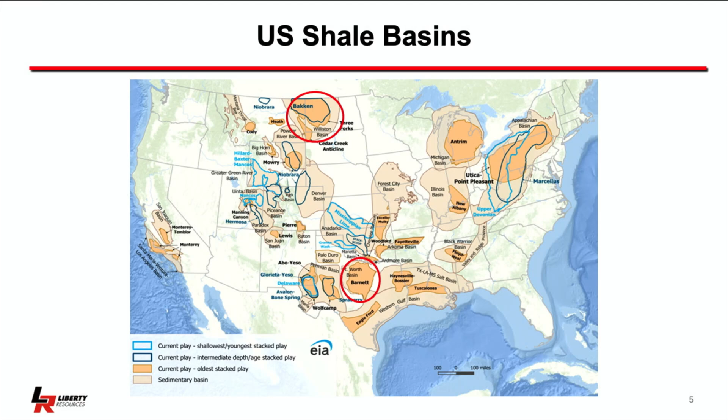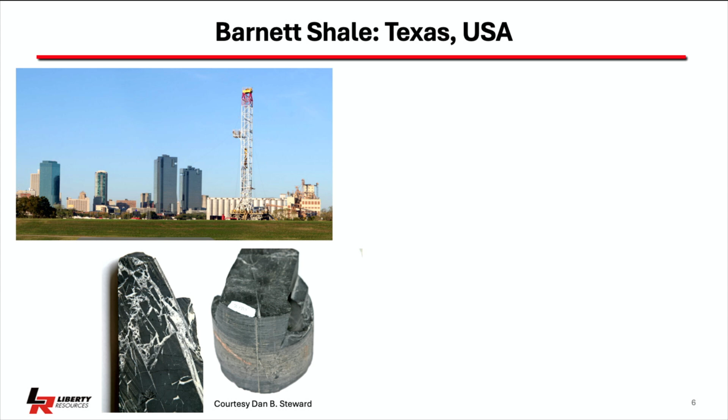Fort Worth sits on the Fort Worth Basin, where the Barnett Shale is. It was the first shale rock actually commercially exploited in a significant manner. By shale, I mean very tight rock, meaning the hydrocarbon, water, even air, is very hard to flow. We measure it in nanodarcies, which are 10 to the minus 9 of a darcy, a flow unit used in hydrology and petroleum engineering.

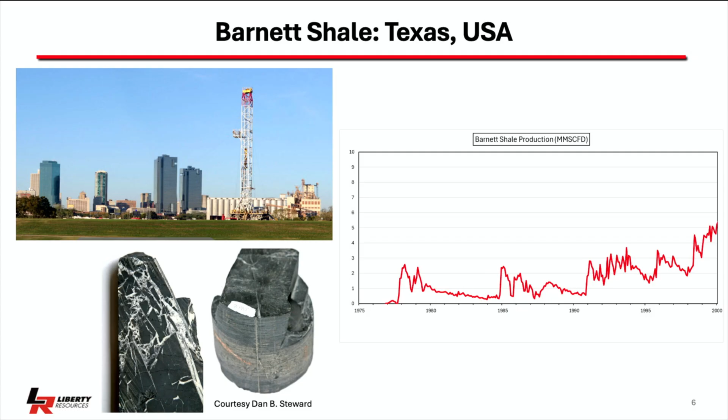First production out of the Barnett Shale actually happened way back in 1977. Production from then through 1997, and for the next 20-plus years, stayed very small, up to 5 million cubic feet a day, as operators tried new wells, drilled new wells, and tried to stimulate the rock to get hydrocarbon to flow.

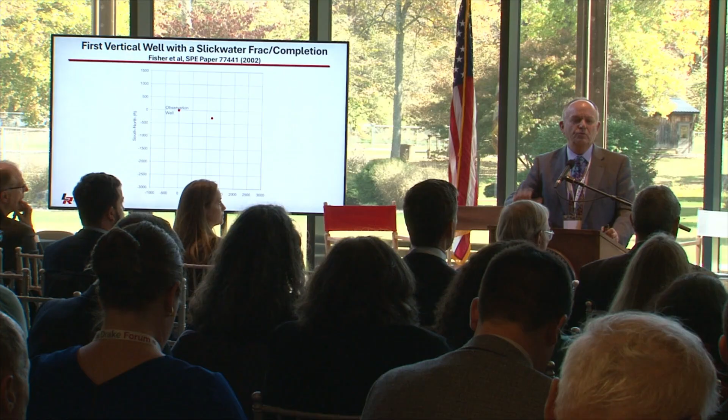Then in 2002, one operator ran an experiment with a vertical well and an offset well fitted with listening devices deep down, and pumped a new type of frac called a slick water frac. When they did that, they measured the noise emanated by the cracks as they formed, mapped them out, and realized this slick water fracturing was creating a much more complex fracture network for production. That well was a big success.

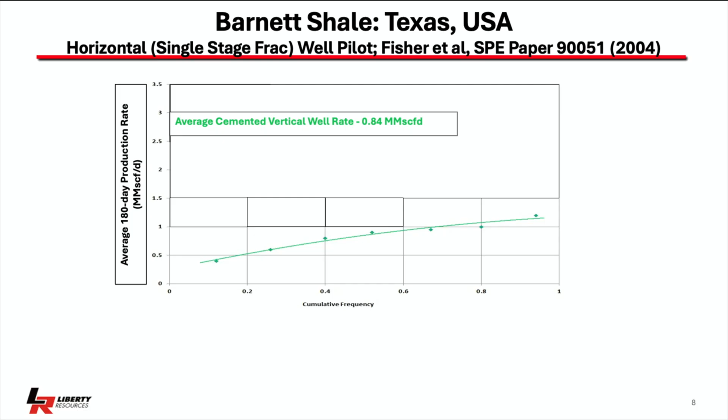The operator drilled 7 vertical wells and fracked them with this slick water process. Here's a production plot, a cumulative frequency plot: those 7 wells averaged just under 1 million cubic feet a day in their first 6 months, 0.84 million cubic feet a day. That was an impressive gain over what had happened in the prior 25 years.

Engineers then looked at the map and thought, what if we drilled a horizontal well going northwest and did a whole series of fracs down it? They tried that in some wells, running 21 of them. Some were cemented, some were not, and this more than doubled the production coming out of the wells.

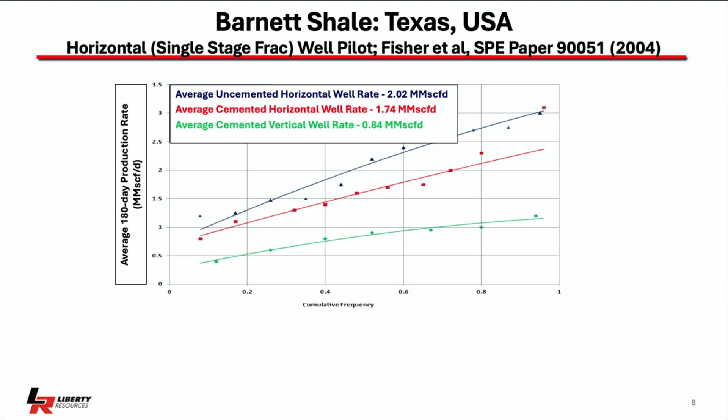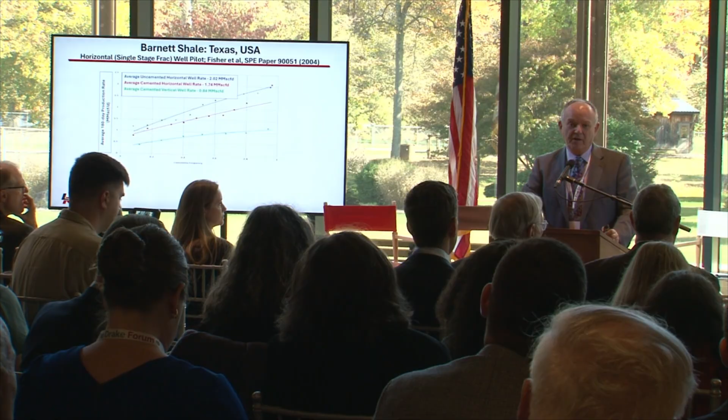I remember in 2005 being in my office in Dallas when a report came over: someone said, did you just hear in the Barnett Shale, company XXX just did 15 frac stages in a well? And suddenly things changed.

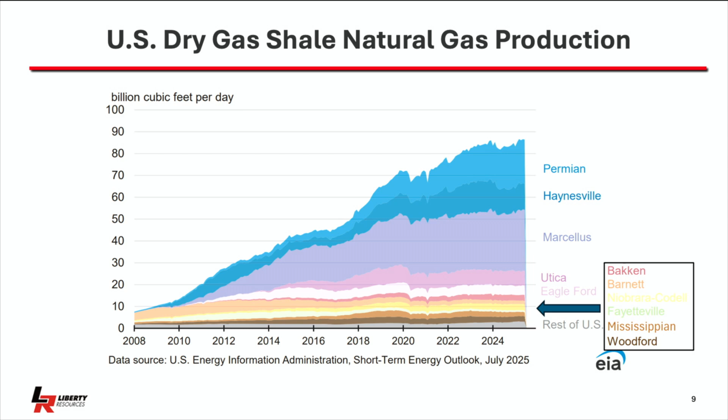Here's a plot from the Energy Information Administration. Back in 2008, that orange wedge was the Barnett Shale, over half of U.S. natural gas production from shales. As we took those lessons to other basins, you see the Haynesville coming on, the Permian growing, and here in Pennsylvania, the Marcellus shale growing to become the largest natural gas producer in the country today. In fact, 85 BCF a day of gas coming out of shale represents 80% of all natural gas produced in the United States.

This is from a resource that didn't even produce economically 25 years ago. 80% of our natural gas — powering everything here — came from a technology that wasn't commercially available 20-plus years ago.

My own company has been working over 15 years in the Bakken in North Dakota. We're headquartered in Denver, Colorado, and operate in Wyoming and North Dakota.

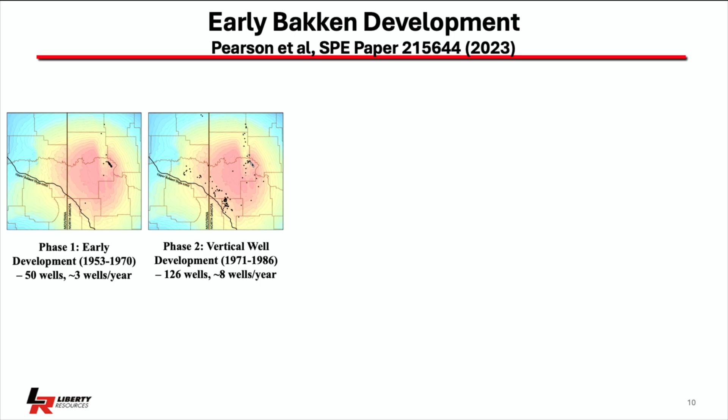Over the next 15 years, from 1971 to 1986, industry was drilling 8 wells a year. Those 8 wells were along structural features, something called the Nesson Anticline, that northern feature in the middle right, and also on the southwest on another structurally faulted area called the Billings Nose.

And then we started horizontal drilling. We found down in that Billings Nose area that we could drill horizontal wells into the natural fractures, and they'd actually produce a little better.

Development then shifted to Montana, to a subfacies, a type of rock at the edge of the basin called the Elm Coulee Field. We had a period of 5 years where development was focused primarily in the Elm Coulee, Montana area, drilling 100 wells per year.

Industry found on the eastern side of the basin a similar thing, better quality rocks. So wells were drilled on the east and the west of the basin. The first few wells were drilled in the middle part, which we call the central basin. But those wells were totally uneconomic.

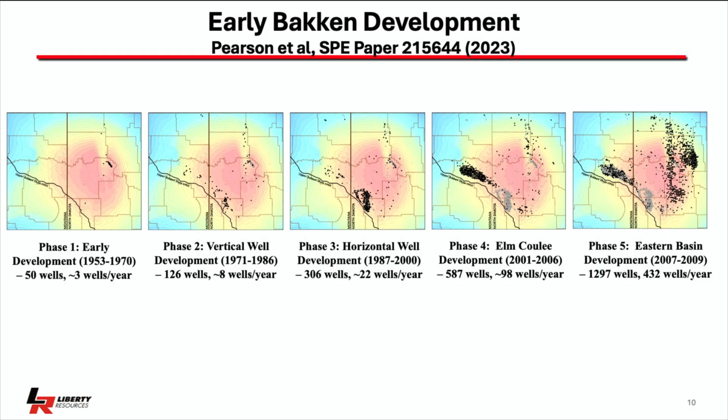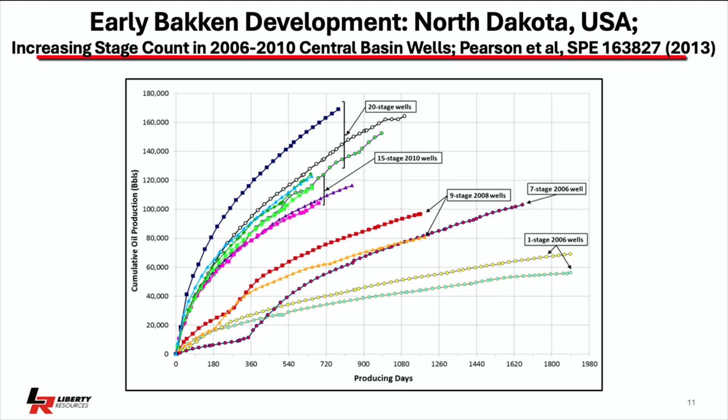Here's a plot showing some of the first wells on the bottom here, that in a 6-year period, those wells cumed a total of about 60,000 barrels of oil. Now, if oil is $50 a barrel and you get 60,000 barrels in 6 years, that's $3 million of revenue for a well that cost you $8, $9, $10 million. Plus you've got to pay taxes, plus you've got to pay royalty owners.

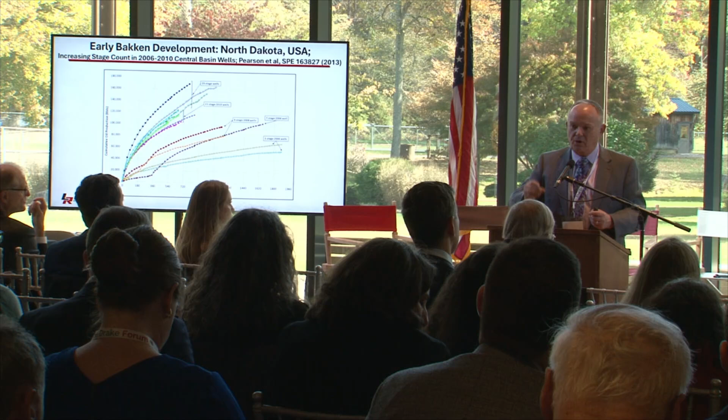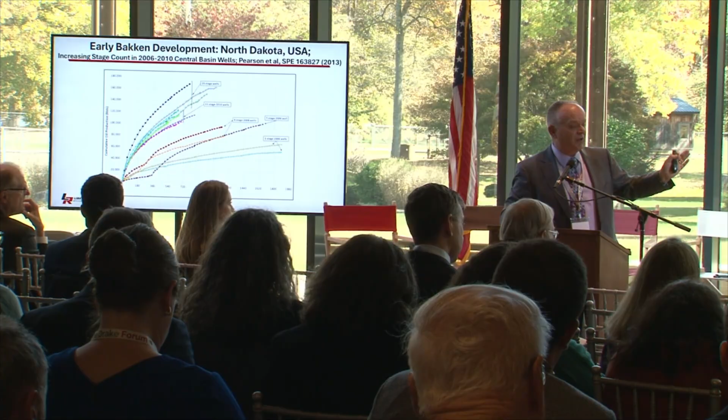Totally uneconomic. But what we found is that as we divided up the sections of the well into mechanically isolated different parts, which we call stages, and did different fracs in each of those stages, suddenly we go from 60,000 barrels in 6 years to 60,000 barrels in 3 to 6 months. Suddenly the economics have totally changed through the application of the technology of how we're fracking the rocks downhole.

Well, what happened? The whole basin gets filled in, drilling 1,500 wells per year, 11,000 wells drilled in a 6-year period. Things were pretty crazy in the Bakken during this period. Today, a more gentle, sustained level of just under 900 wells a year being drilled.

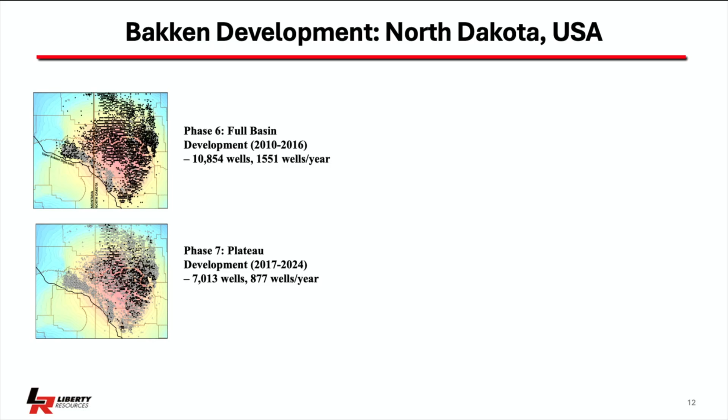Production in the Bakken went from 100,000 barrels a day in North Dakota, conventional and unconventional, to 1.5 million barrels a day. And today it's plateauing out at around 1.15 million barrels a day of oil.

So that was the first shale oil development that became economic. Again, similar to what happened in the gas markets, the oil markets were the same. The color hasn't quite come out here, but on the top, there's a pink area showing we've gone from 300,000 barrels a day from tight oil production to 9 million barrels a day.

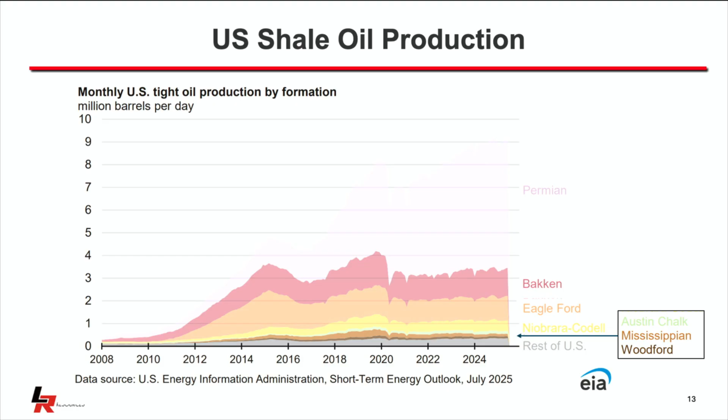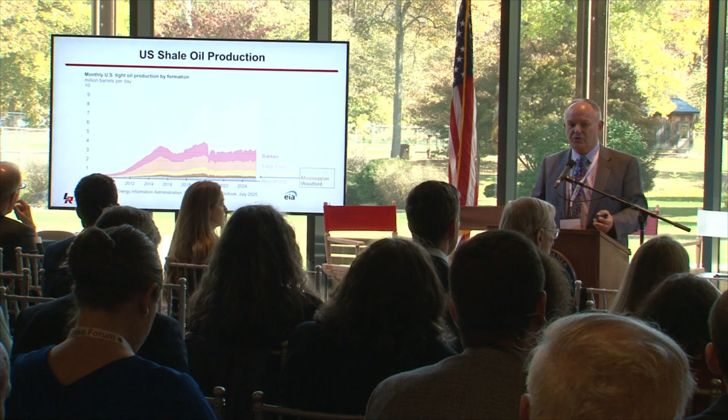That top wedge is the Permian Basin that's driving U.S. oil production. 9 million barrels a day from shale oil production out of 13.4 million barrels a day total. About 75% of our oil production is coming from these shale oil reservoirs. You see the Bakken is still there, the second largest production, the Eagle Ford in Texas, the Niobrara Codell in Colorado, and a number of other plays. So again, in 20 years, totally changed the U.S. energy position, not from oil being created, but by the application of technology, changing a resource into a reserve.

Okay, well, what's really driven that? What's driven it has been this technology that the media likes to call fracking. A tech guy like me, we call it hydraulic fracturing, but we can call it fracking today. I don't have a problem with that.

If you look, fracking was developed in 1947 by a predecessor company of Amoco called the Stanolind Oil Company. The first wells fractured were in Kansas and then Oklahoma, and then it spread from there.

What I've got plotted here is the number of wells per year that were fracked and the percentage of the total number of wells. You can see that in the first 35 years, about 40% of all wells in the U.S. were being fracked using hydraulic fracturing. Drilling peaked in the U.S. in December 1981, with 4,500 drill rigs running, and we were producing about 8.5 million barrels a day of oil.

Well, then fracking really took over. The brown dashed line shows that over 90%, even 95%, of all wells are fractured today in the United States. And you see a little blue wedge right at the bottom? We're just beginning to see horizontal drilling and horizontal applications taking off, a lot of those in fractured carbonate formations that weren't fractured before, with the beginning of maybe 35% of wells being fractured.

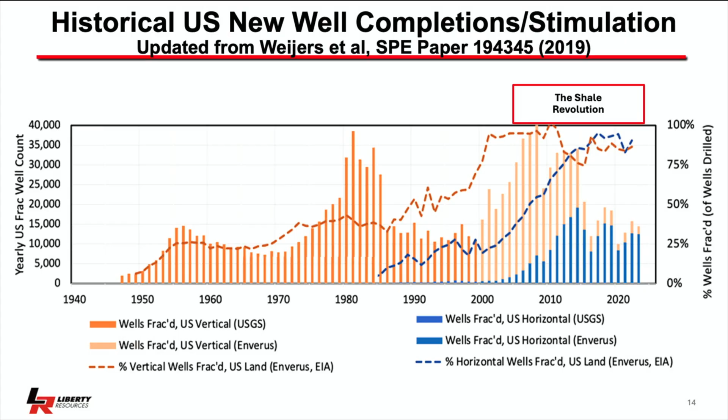And then look at what's happened in the shale revolution. The percentage of wells that are horizontal and being fractured just took off, with over 90% of our wells now horizontal, the blue bars. So it's a horizontal industry, whereas 25 years ago it was a vertical industry. It's a fracked industry as opposed to a half and half fracked and unfracked industry.

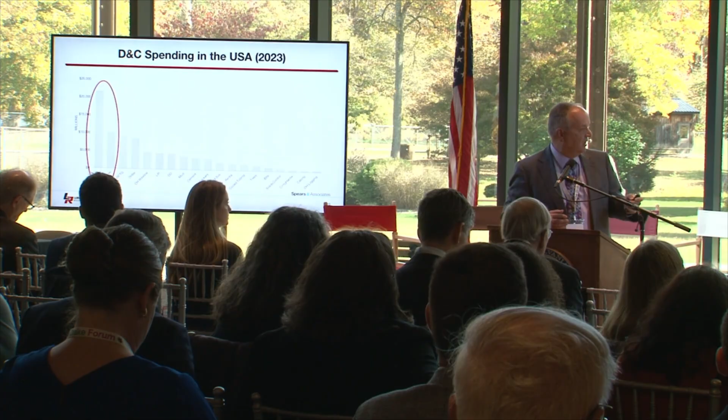Well, what's that resulted in? It used to be that drilling of wells was the most important thing and the largest capital spend in our industry. Today, fracking and supplying water is more than double the expenditure compared to drilling. In fact, the actual drilling of wells is only the fourth largest component of being an oil and gas developer today. So it's a big change - we're really a fracking industry as opposed to a drilling industry.

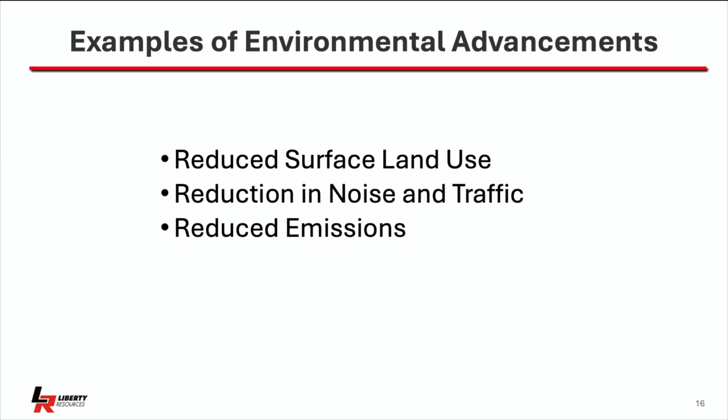Now I'm going to talk a little bit about the environmental side of that because it's really important. I consider myself an environmentalist. I also happen to be pro-development. So I want to talk about three things here of how industry and companies like mine have reduced our environmental footprint: surface land use, noise and traffic, and reduced emissions.

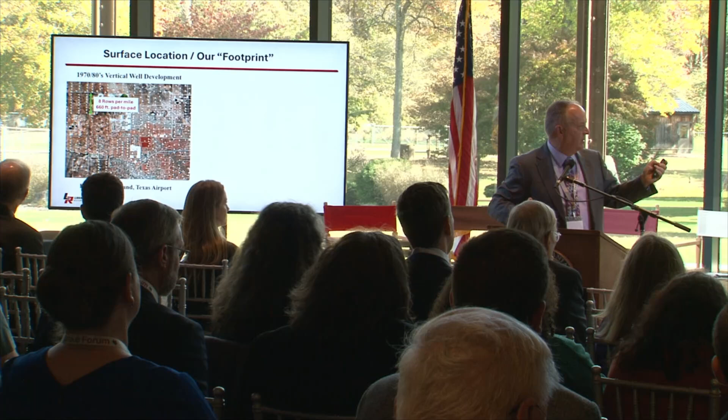In the old days, in the 70s and 80s when I entered this industry, if we had a 2-mile by 1-mile spacing unit we were going to develop, we would perhaps develop it with 32 wells on 40-acre spacing, or 64 wells on 20-acre spacing. In fact, I was flying out of Midland Airport just a couple months ago, runway 34, and looking out to the left as I'm taking off, this is what you see in Midland - 8 rows of wells per mile. It's 20-acre spacing, vertical well development.

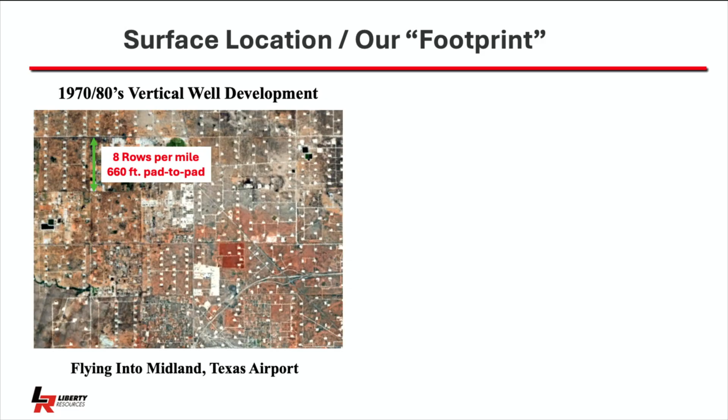A lot of surface use - every 660 feet, another pad, another drilling pad impacting the environment. Well today, we develop that same 2-mile by 1-mile spacing unit with typically 4 wells in the industry, spaced 1,300 feet apart, but just 4 individual wells.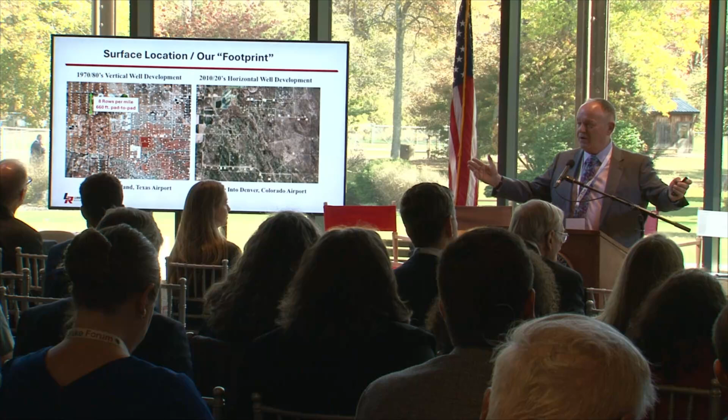And if you choose to come to the Centennial State, come to Colorado, and fly into Denver Airport, this is what you're going to see about 10 miles north of Denver. Those pads are 4 miles apart. We've gone from 660-foot spacing to 4 miles apart for these pads for horizontal well drilling.

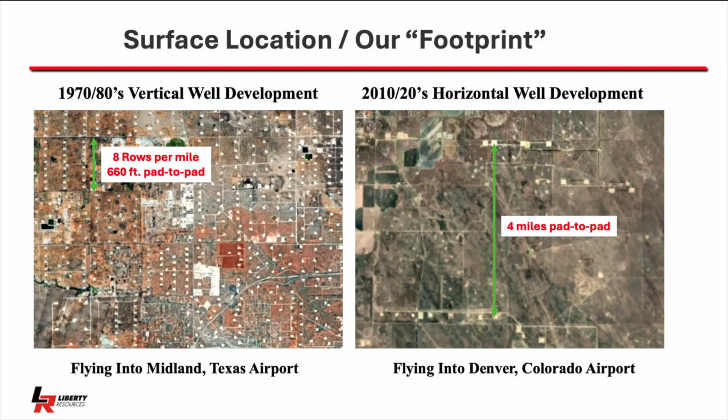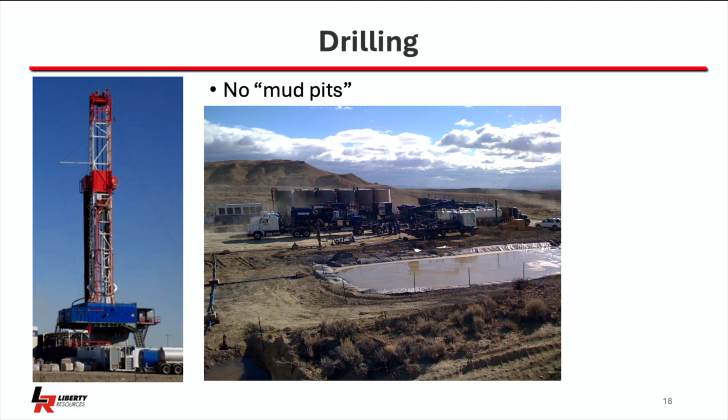And the drilling itself - I pulled up this picture I happen to have in my archives of a development I was working on in Wyoming 20-plus years ago. It was standard to have a pit, a lined pit monitored by the state. We called it a mud pit or a reserve pit. All of our drilling muds went into this. It had to be reclaimed. The liners are folded in, but you're burying the waste on location on each pad. That was standard operating practice 20 years ago.

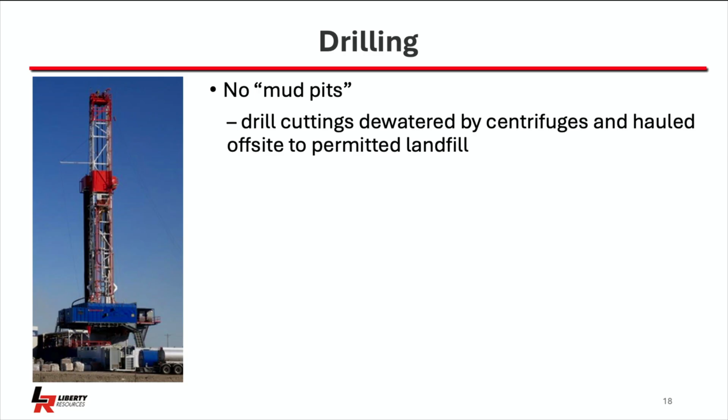Today, no drill cuttings, no reserve mud pits in the industry. We dewater the muds, we recycle it, and the solids that are left are hauled to a permitted location. We have walking rigs.

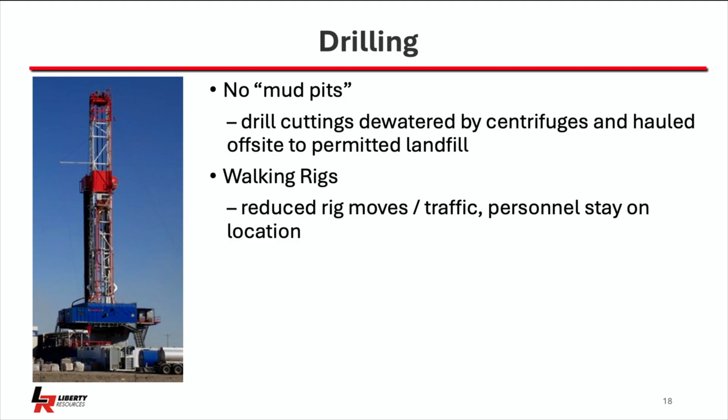This is a standard rig in one of our operations. These rigs can stand up and just walk from one location to the other. We used to have to move location with trucks - 50, 60 trucks - moving a rig, taking it down, moving it. A rig will typically stay on location 2 to 3 months or even longer in one location, reducing the amount of traffic.

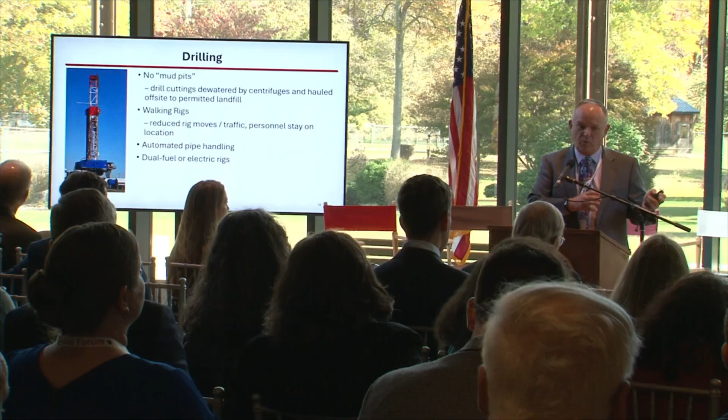From a safety standpoint, we have automated pipe handling systems so people are not getting their fingers caught, and we don't have the same accidents. A significant number of our rigs are dual fuel rigs, meaning they can run on natural gas as well as diesel, and there are a number of rigs that are electric rigs as well.

Now I'm going to talk about completions. Completions is the connection of the well to the rock. Everyone talks about the oil and gas industry as the drilling of wells, but I would actually argue as the completions engineer that it's connecting the rock to the pipe that's going to transport the oil and gas to the surface. We call that completions engineering.

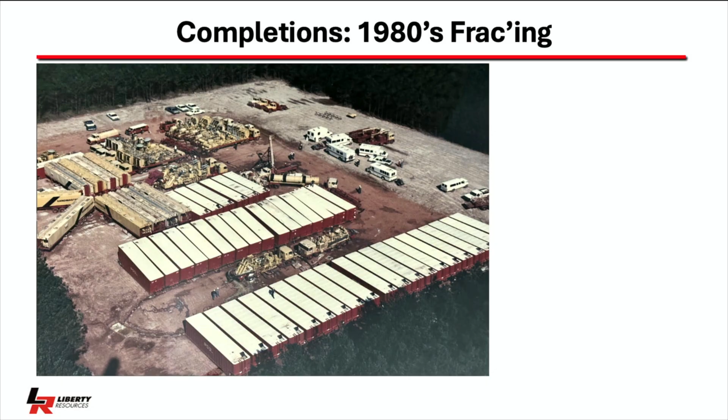This is an aerial picture of a frac site I was running 35 years ago in East Texas, the Cotton Valley Formation. You see that big area, a 20-acre pad location, two-thirds of it filled with big tanks filled with the water we're going to frack with. On the left-hand side, those yellow transports are sand units, each containing about 300,000 pounds of sand. It would take about 4 days round the clock, or a week working just daylight, to fill up all the sand and fluids and handle all the traffic going to that location.

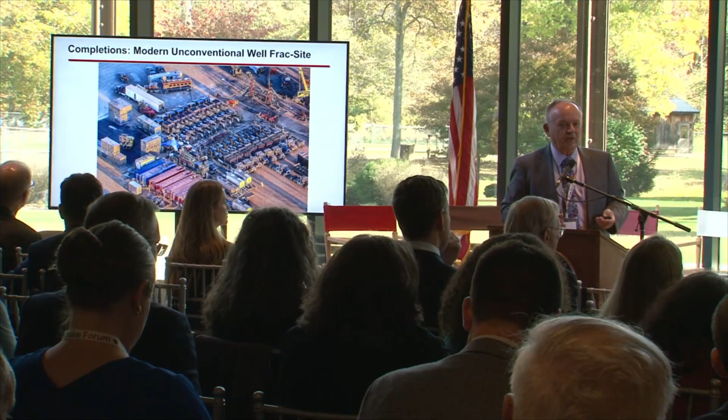What do you see as the difference? There are only a few tanks there because everything's being pipelined. They're just the working tanks, the holding tanks.

Down at the bottom here, we have our chemicals coming to location—typical chemicals you'd find in your own kitchen—but they're all contained in chemical transports with pads around them to make sure that if there's a drip or any leakage, it doesn't go on the ground. Our sand here is coming in gravity-fed containers, so we're not blowing sand and silica dust into the air for employees and the public to breathe.

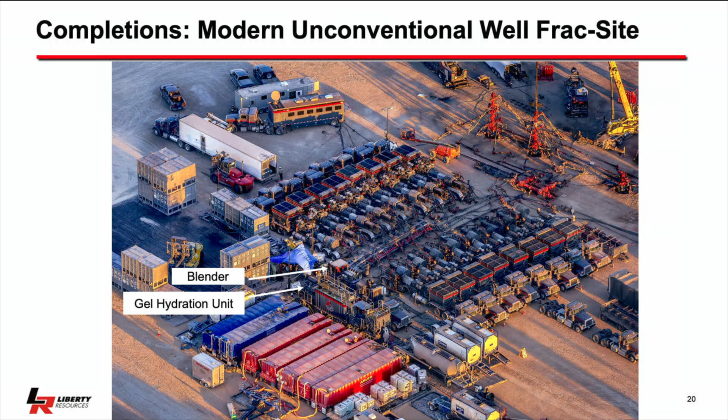The fluids and the sand are mixed together in a couple of blending units. It then goes to the horsepower that's going to provide the energy to crack the rock. We control everything in a control van, and then it goes down the wellheads.

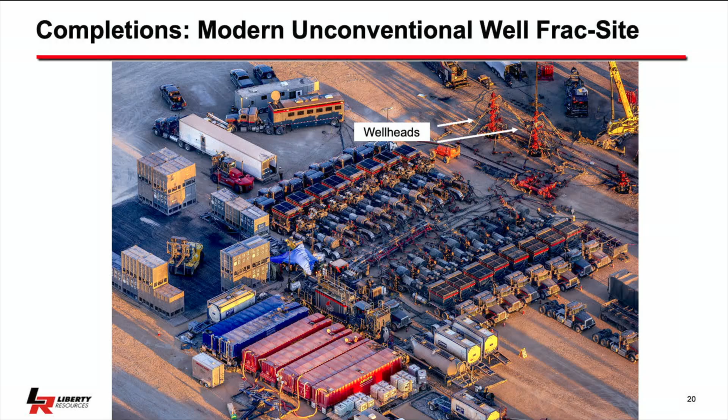What's interesting in our industry as well—this is one of my own locations here, where we're fracking and cracking the rock. But notice here in the foreground, we've already got all the production tanks and production facilities built, because we're also running what we call green completions. So when the well starts flowing back, we've already got all the production facilities built, and the gas is not being flared—it's being captured straight away and sent to a pipeline.

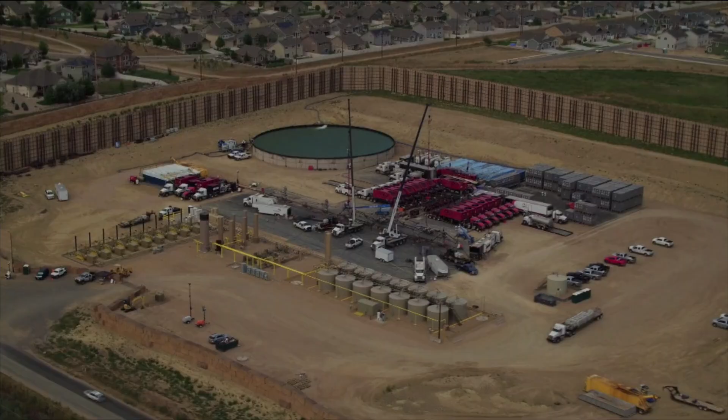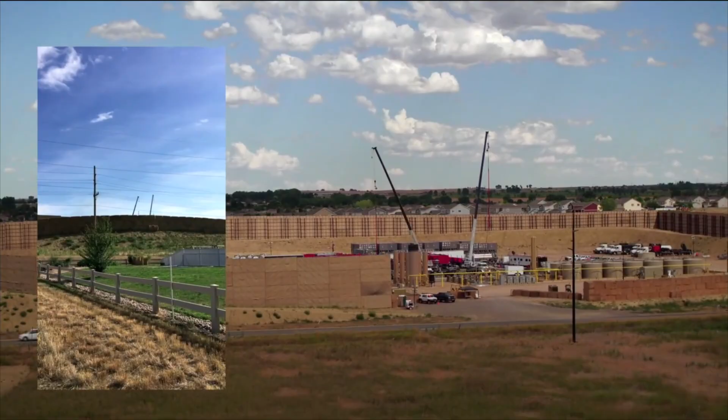Standing right next to the houses that are 500 feet away, and right now we're fracking at 80 barrels a minute—see if you can hear it. Can't hear anything.

So in areas like Denver, where the DJ Basin has come up against development, we can even be fracking and running our wells very close without disturbing neighbors or the population around us.

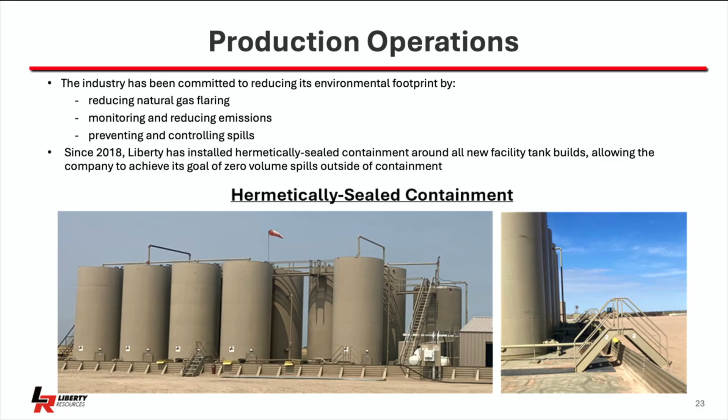Quickly, let me finish up with a bit on production operations and the kind of things industry is doing. This is a shot of one of our company's production facilities. You can see everything is surrounded by steel dikes to protect against a spill. On the right-hand side, you can see we've got hermetically sealed liners underneath all the tanks, so that if there's a spill, it doesn't go into the land and doesn't cause any pollution whatsoever.

On our vapor recoveries from our tanks, all of the vapors are recovered. At one time, industry would typically flare that gas, which became an issue, so industry started installing vapor recovery units. I happen to be on location for the startup of one here. We go from 500,000 cubic feet a day of gas being flared to very little, and after a few days, to nothing being flared on location.

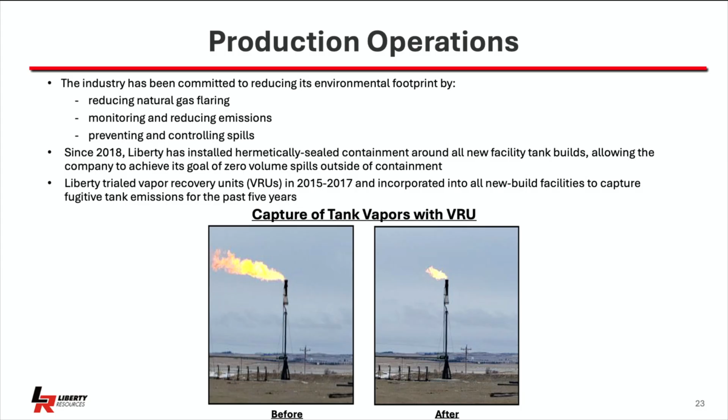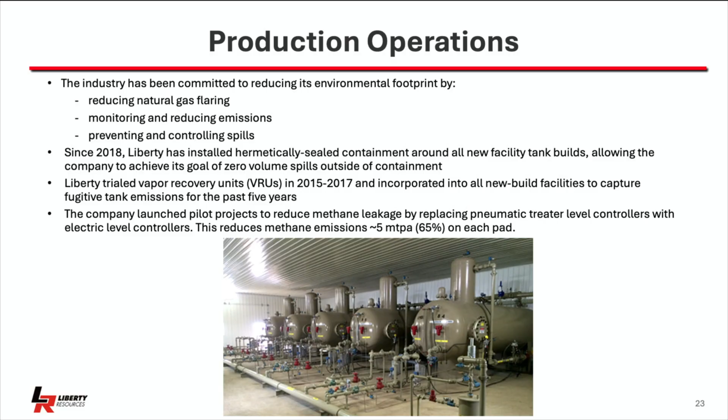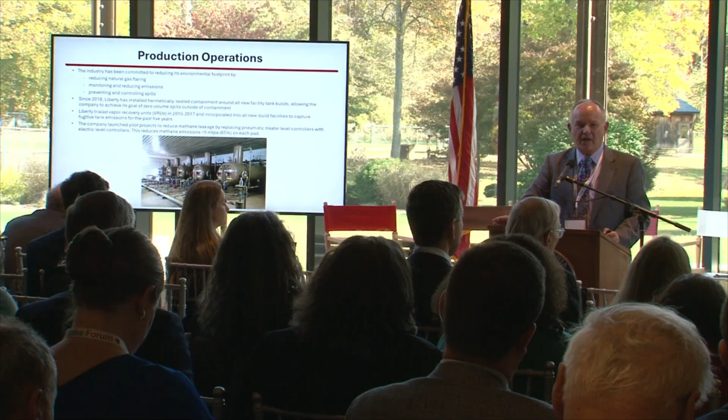One of the sources of methane emissions on oil and gas operations are our separators. These are three-phase separators that separate oil, water, and gas that comes out of the well. The gas comes up at the top part of those units, and then there are level controllers that used to be gas-operated, natural gas-operated. They were causing 65% of the leakage of methane gas on our locations. Many companies now have changed those all out to electric controllers so that we're not leaking the gas.

So again, just continuous improvement in operations in how we run our business. A number of other industry improvements as well in operating practices to reduce our impact.

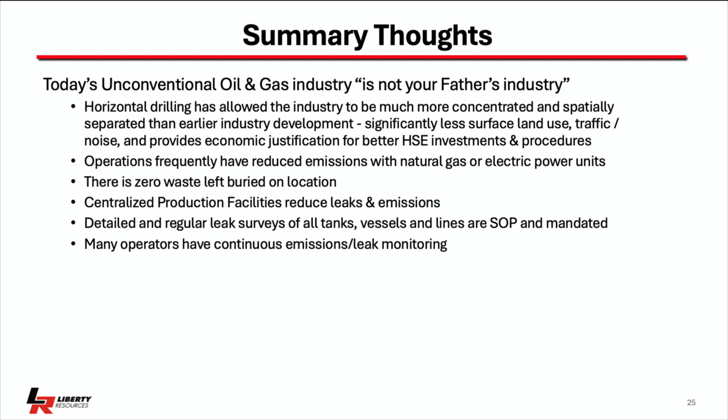So my summary thoughts: today's unconventional oil and gas industry is not your father's industry. Horizontal drilling has allowed the industry to be much more concentrated and spatially separated than earlier industry development. Significantly less land use, less traffic and noise, and that concentration allows the economic justification for better health, safety, and environmental investments and procedures. Operations frequently have reduced emissions with natural gas or electric-powered units. There is zero waste left buried on location. Our centralized production facilities reduce leaks and emissions per well, and detailed and regular leak surveys are mandated, and the standard operating procedures are mandated by the states in which we operate. And many operators have gone to continuous emissions and leak monitoring as well to report, as Mike was talking about this morning.

So the USA is an energy powerhouse, producing more oil and gas than any other country, with some of the cleanest environmental standards in the world, and an industry that is committed to continuous environmental improvement. So with that, I'll say thank you.